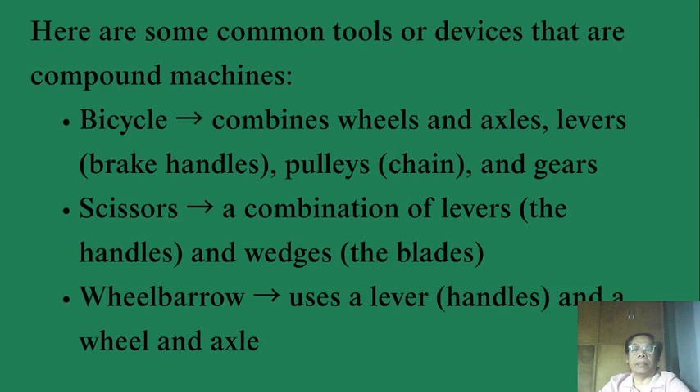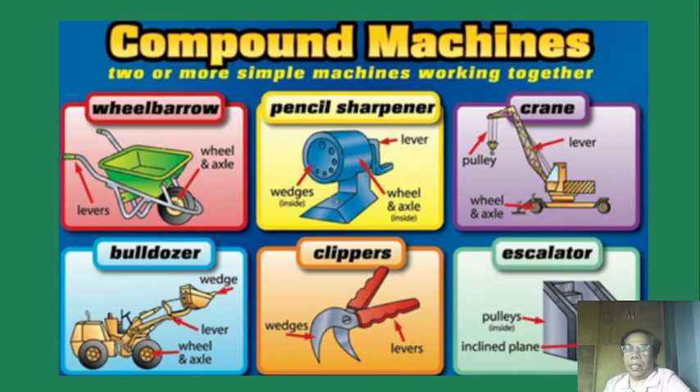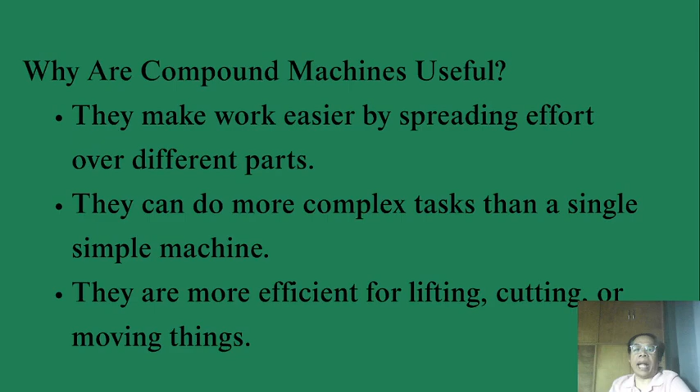Next, why are compound machines useful? They make work easier by spreading effort over different parts. They can do more complex tasks than a single, simple machine. They are more efficient for lifting, cutting, or moving objects.

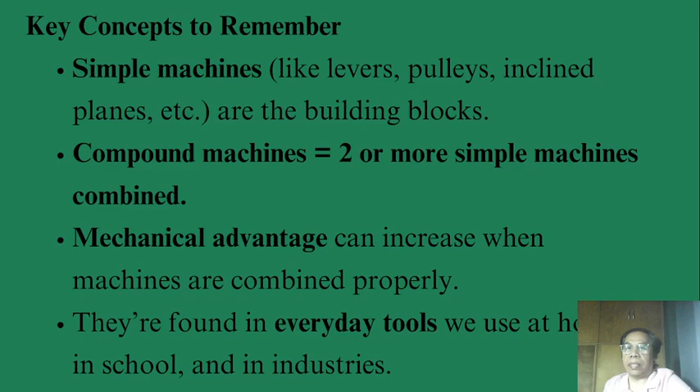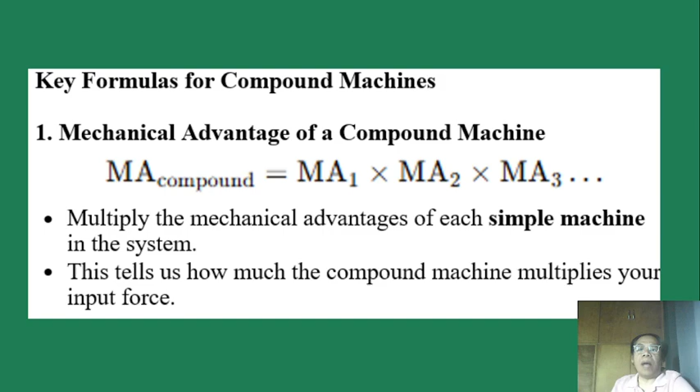Key formulas for compound machines. Mechanical advantage of a compound machine: the mechanical advantage of the compound machine is the mechanical advantage of the first times the mechanical advantage of the second, multiplied by the mechanical advantage of the third simple machine. So, multiply the mechanical advantage of each simple machine in the system. This tells us how much the compound machine multiplies your input force.

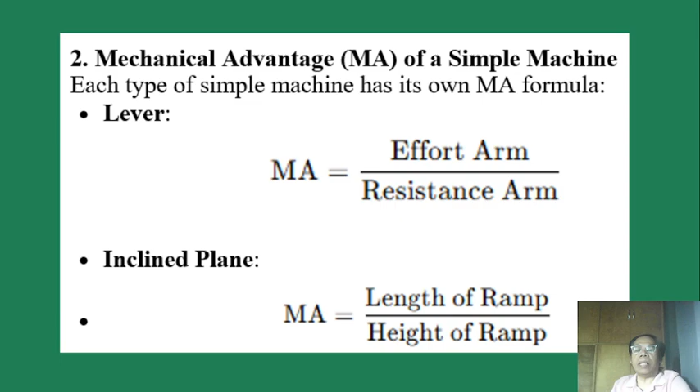Number 2, mechanical advantage of a simple machine. Each type of simple machine has its own mechanical advantage formula. Lever: mechanical advantage is effort arm over resistance arm. Inclined plane: mechanical advantage equals the length of the ramp divided by the height of the ramp. Pulleys: mechanical advantage is the number of supporting ropes. Wheel and axle: mechanical advantage equals the radius of the wheel divided by the radius of the axle.

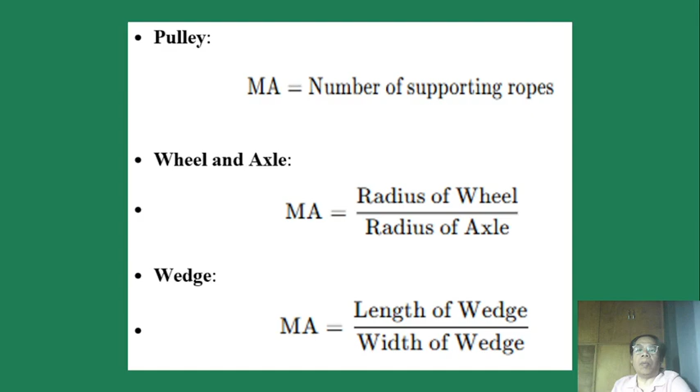Wedge: the mechanical advantage is the length of the wedge over the width of the wedge. And then a screw: mechanical advantage equals 2 pi times the radius divided by the pitch of the thread. And then efficiency of a compound machine: efficiency equals the work output over the work input times

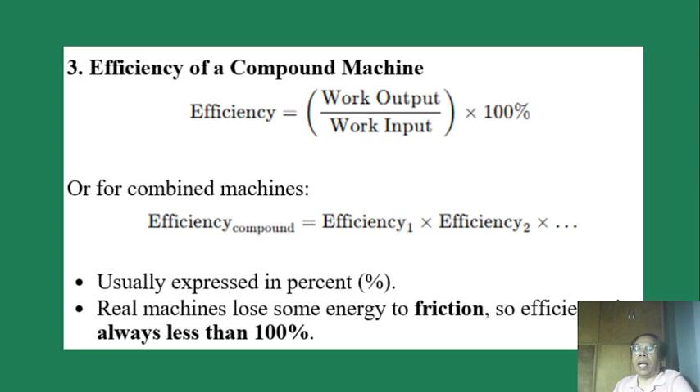100%. Or for combined machines, the efficiency of the compound machine equals the efficiency of the first multiplied by the efficiency of the second simple machine, multiplied by so on and so forth. Usually expressed in percent. Real machines lose some energy to friction, so efficiency is always less than 100%.

Next, work and power formulas, related concepts: work is equal to force times distance, and power equals work divided by time.

Practice problems. A wheelbarrow is a compound machine that uses a wheel and axle and a lever. If a person lifts a load of 100 newtons using a wheelbarrow and applies an input force of 25 newtons, what is the mechanical advantage of the system? The load output force is 100 newtons. The input force is 25 newtons. The mechanical advantage is required. To get the mechanical advantage, divide the output force by the input force. Substitute the given data, the answer is 4. So the final answer, the mechanical advantage is 4.

Next, number 2. A can opener combines a lever and a wedge. If the input force is 15 newtons and the output force exerted by the cutting edge wedge is 60 newtons, calculate the mechanical advantage. Given input force 15 newtons, output force 60 newtons. Required: the mechanical advantage. Mechanical advantage equals the output force divided by the input force. Okay, substitute the given data.

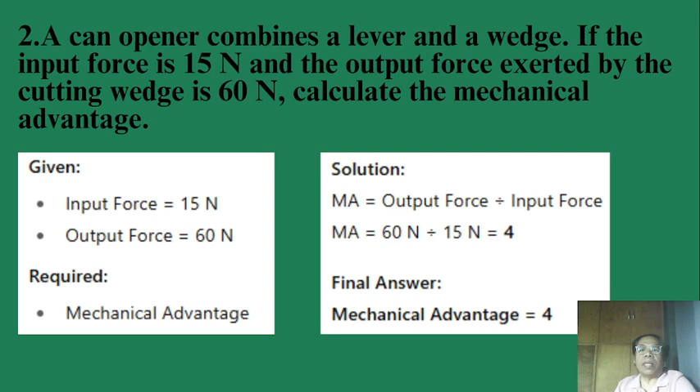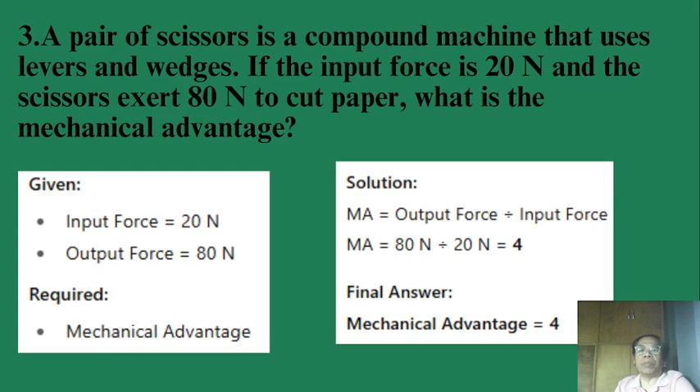The answer is 4. Number 3, a pair of scissors is a compound machine that uses levers and wedges. If the input force is 20 newtons and the scissors exert 80 newtons to cut paper, what is the mechanical advantage? Input force 20 newtons, output force 80 newtons, required the mechanical advantage. Use the formula output force divided by the input force. Substitute the given data. The final answer is 4.

efficiently. Number 5, a compound machine has an input force of 10 newtons and lifts a load of 50 newtons.

If the distance over which the input force is applied is 2 meters and the load is raised by 0.4 meter, calculate the work input, work output, and the efficiency of the machine. Given: input force 10 newton, input distance 2 meters, output force 50 newton, output distance 0.4 meter. Required: work input, work output, and efficiency.

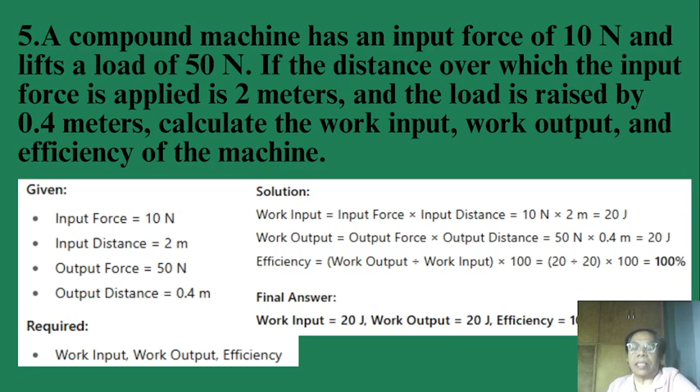Number 6, a car jack combines a screw and a lever. If the user applies a force of 30 newton through a handle that turns a screw and the output force is 600 newton, what is the mechanical advantage of the jack? Given: input force 30 newton, output force 600 newton. Required: mechanical advantage. Solution: the formula, mechanical advantage is output force divided by the input force. Substitute the given data, the answer is 20.

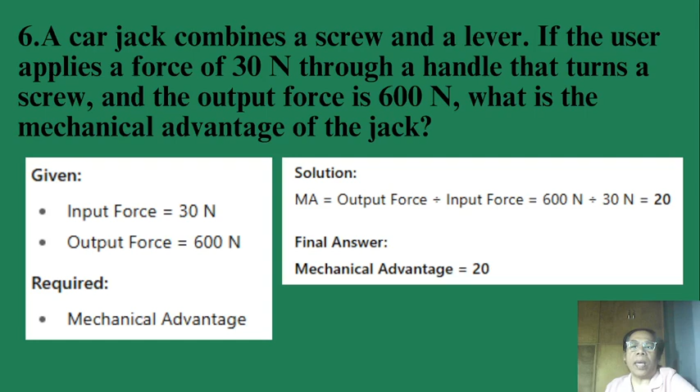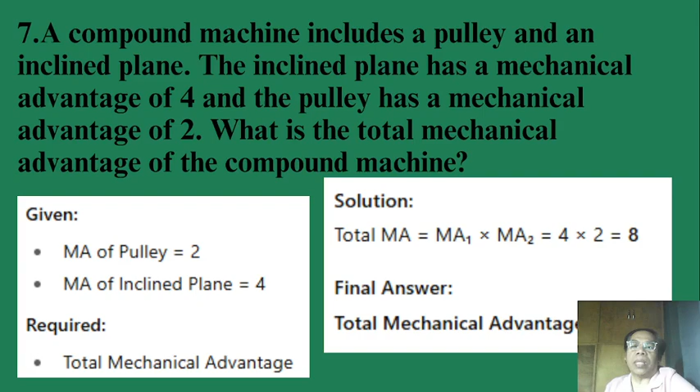And then number 7, a compound machine includes a pulley and an inclined plane. The inclined plane has a mechanical advantage of 4 and the pulley has a mechanical advantage of 2. What is the total mechanical advantage of the compound machine? MA of pulley 2, MA of inclined plane 4. For the total mechanical advantage formula, you will just simply multiply the mechanical advantages of each simple machine. Substitute the given data and the final answer is 8.

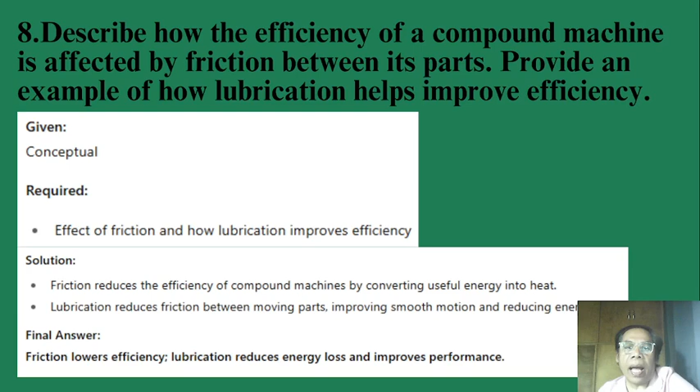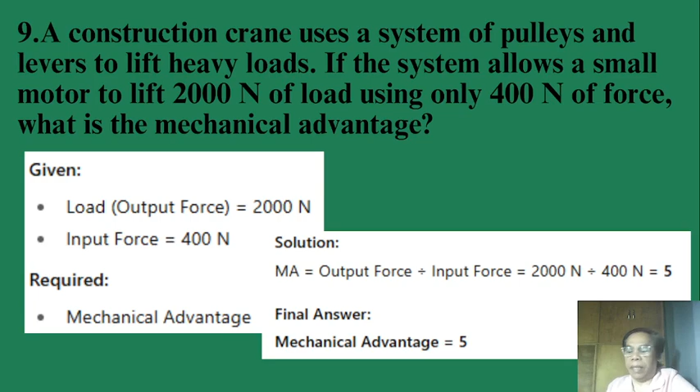And then number 9, a construction crane uses a system of pulleys and levers to lift heavy loads. If the system allows a small motor to lift 2,000 newton of load using only 400 newton of force, what is the mechanical advantage? So we're given the output force, which is the load, 2,000 newton, input force, 400 newtons, required MA. Formula to use: MA is equal to output force over the input force. Substitute the given data. The final answer is 5.